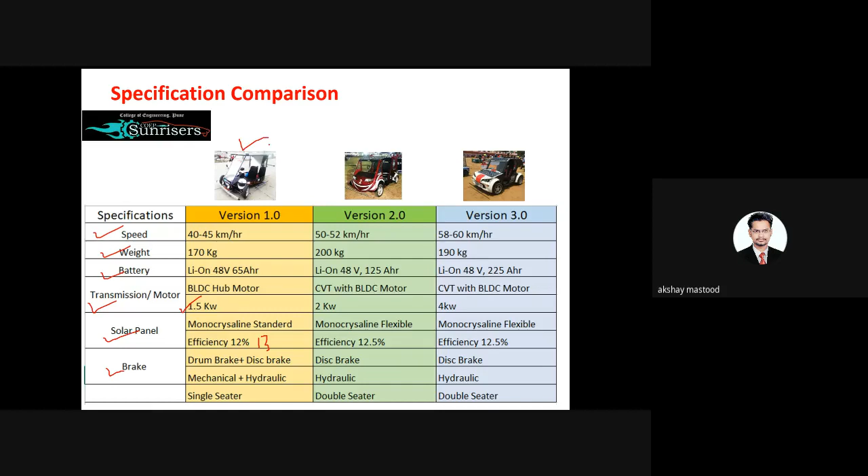The speed is about 40 to 45 kilometer per hour. Weight is about 170 kg. Batteries is lithium ion of specification 48 volt, 65 ampere hour. Transmission and motor is BLDC hub motor, with power rating of about 1.5 kilowatt approx. Solar panel is monocrystalline, with efficiency about 13 to 18%. Drum, and we use the combi brake system here. This is the first vehicle, a single seater vehicle. So these are some basic specifications of version 1.

Here we have the lab, so you will get to know what I did with the team. These are some glimpses or pictures, have a look just for 2 minutes. These are our lab, all machineries are there, related tools and everything is there. Our team consists of a different group of people, like electrical, electronic, mechanical.

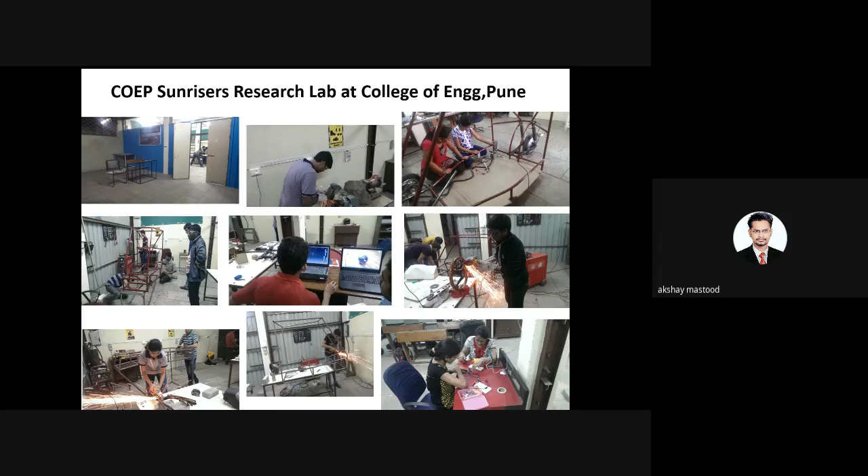And this is the particular vehicle what we are going to discuss. This is a very basic vehicle. At the initial period of time, we didn't have so much time and funds. So this is the basic vehicle we have to discuss in this particular session.

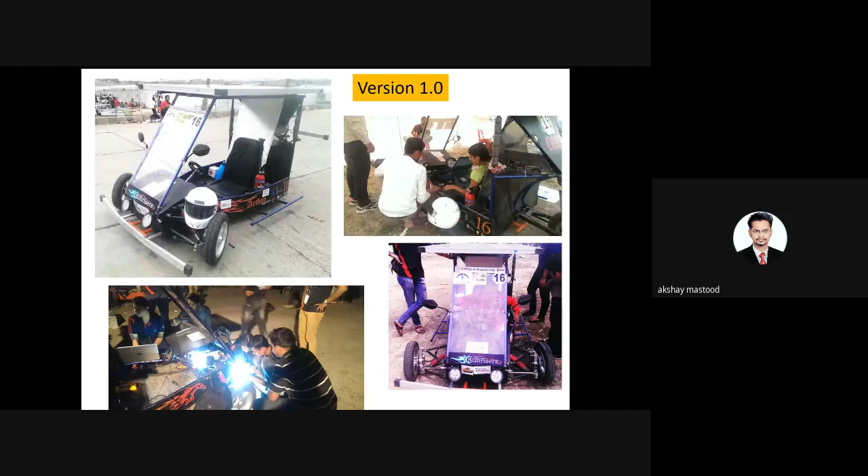So solar electric vehicle, guys, is divided into 2 kinds of systems. First is a mechanical system, and second is an electrical electronic system. I'm sure you're all aware of these systems. According to my study, about 45% is contributed as a mechanical system in the electrical vehicle, and roughly 55% is the electrical electronic system in the vehicle. In the mechanical system, these are the things: chassis, steering system, braking, suspension system, transmission system, body.

Electrical electronic system consists of motor, controller, battery and BMS, that is battery management system, solar panel and MPPT - maximum power point tracking, sensors, switches and wire harness. So these are the things we have to discuss.

Again, I am telling what we are going to discuss. First, we are going to discuss with respect to very specific constraints in a very crisp manner, which is given by the ISI - that is Imperial Society of Innovative Engineers. They give a specific constraint and rules, and according to that we design our system. We are going to discuss every design calculation roughly, in a very broad manner, not in detail.

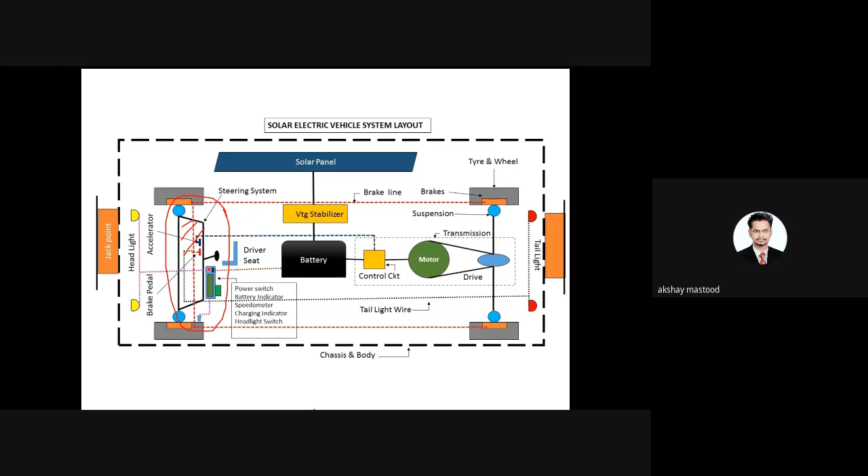So we'll start with the first system, that is chassis. This is the first system, chassis, and this is the design methodology.

How we started with rough sketches. We studied and selected that we have to design with respect to a tubular kind of roll cage design. Many chassis types are there - those with mechanical background are very familiar with chassis. Body on frame chassis, uni body, monocoque, tubular, roll cage - these are the types of chassis. So we selected roll cage kind of chassis.

The material is, I think, AISI 1018. So the first step of design methodology is to start with a rough sketch, after that go for CAD modeling in CATIA V5.

After that you have to go for crash analysis in ANSYS or Hypermesh. For the first two versions we used ANSYS, and after that for the next version we used Hypermesh.

After that you have to do the analysis, stress and deflection analysis, find out any weak point, and again change the CAD modeling according to the results you are getting in ANSYS. After rectifying all these things, again you have to follow the same process, go for the crash analysis again, if you are satisfied or getting proper readings under a certain range.

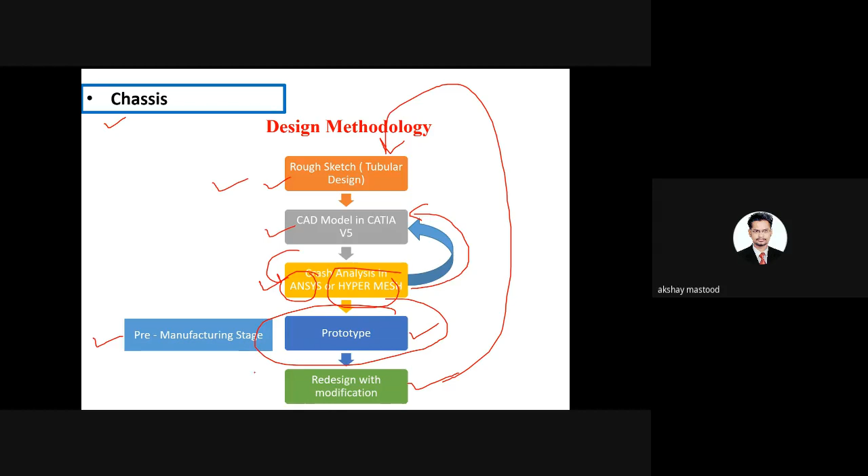So this is the design consideration - weight of the chassis should be as low as possible. Our chassis weight, you will be surprised to know, is almost 20 to 25 kg of the entire weight. I actually weighed this particular chassis, and I will show you the pictures.

After that, the design should allow for driver egress of 5 seconds. This means, for visibility point of view, egress of 5 seconds is important in case any electrical issues come or any failure of the system occurs.

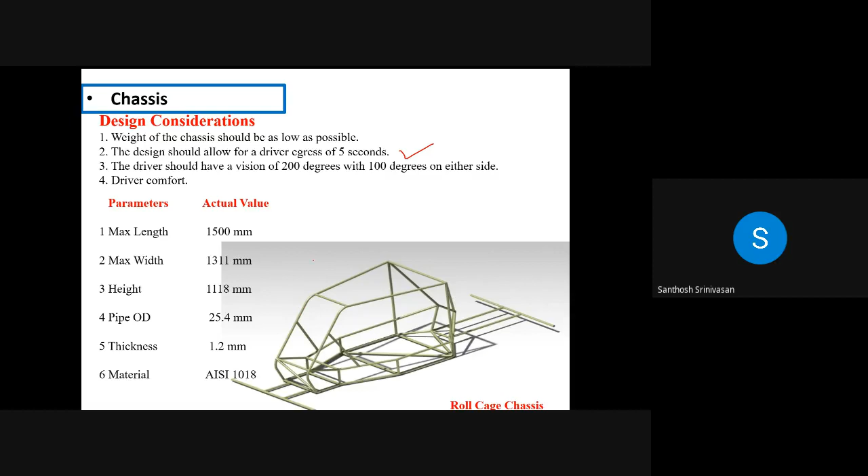Hello, yes sir, please continue. Okay, fine. So this is the chassis.

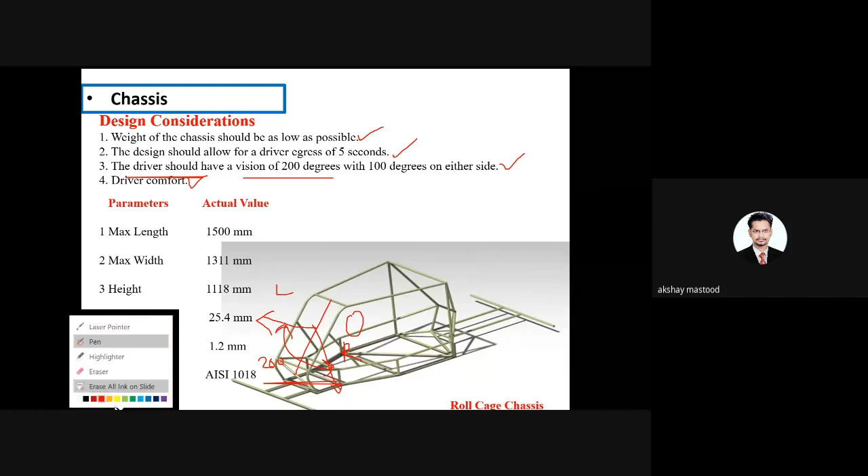Okay, and here if you observe, these are the parameters we selected after doing trial and error again and again. We finalized these parameters.

And from this is my experience, I want to share with all of you, that it's not the case that whatever we do from the design point of view is always applicable from the practical point. No, there is almost a 20% change there. Always there is a 15 to 20% change definitely there.

So these are the design point of view parameters we finalized. Maximum length is 1500. This parameter also has a constraint as per the rule book. So within that constraint we have to manage all the parameters, and obviously we have to take care of other systems too, as it is a definite requirement.

Maximum width is 1300 mm, height is 1100 mm, pipe diameter we selected is 25.4 mm, and the thickness of that pipe is almost 1.2 mm, and the material is AISI 1018. So all these parameters are very important, basic parameters related to chassis.

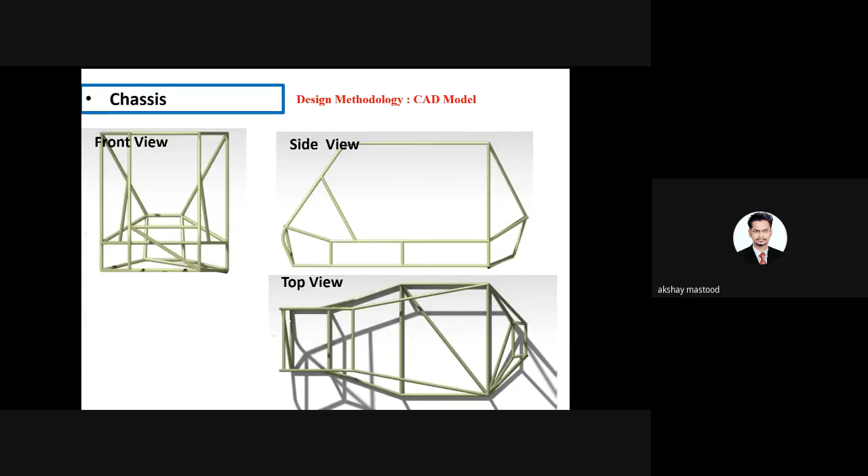So this is a front view, this is a side view, and this is a top view of the vehicle chassis.

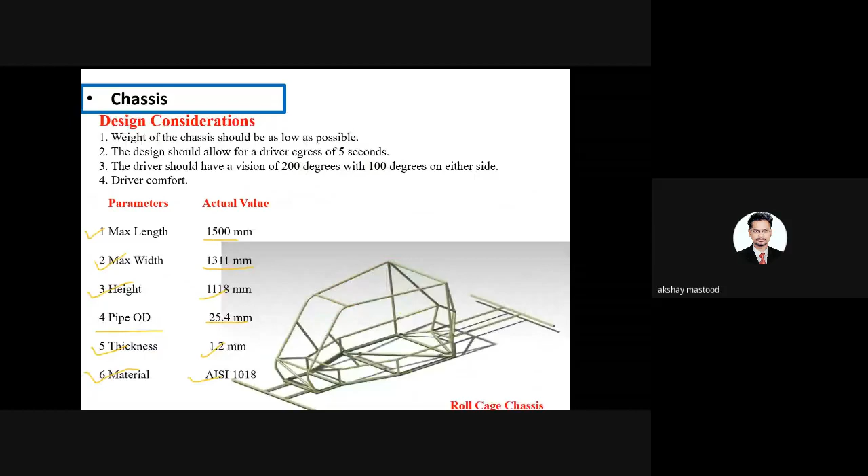Design methodologies, the next step. In the first step we design the CAD model of the chassis. In the second step we have to follow the crash analysis.

In which we have to follow some tests. Now why do we require all these tests? Definitely we have to check, in each test, whether our chassis is sustainable or not. This is a requirement, and also a design report requirement. So front impact test, side impact test, bending test, torsional test, and bump test.

And these are also followed in commercial vehicles, as you experience in cars on the roads, or conventional cars basically. And what are we going to find from all these tests? Deflection and stress plot, under all these tests.

So these are simple steps: we make the CAD model, we do the meshing, and after that we come to ANSYS. In ANSYS we are doing meshing and all, and we are giving some constraints, or following some theories, and we'll get to know the stress plot or deflection plot here.

Which is the weakest part, the stress point. Those who are non-mechanical, I don't know if they are aware or not, but I want to give a short statement. Why are we doing this? We are doing it to understand which is the weakest part in the chassis when they are facing such kind of impact.

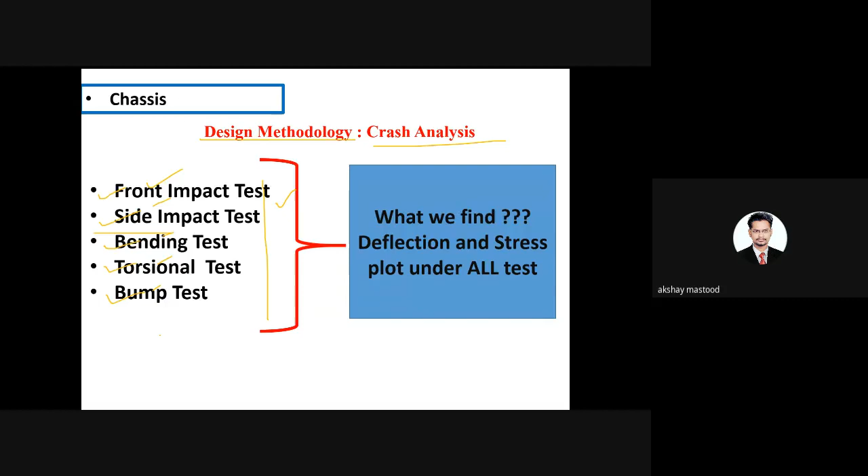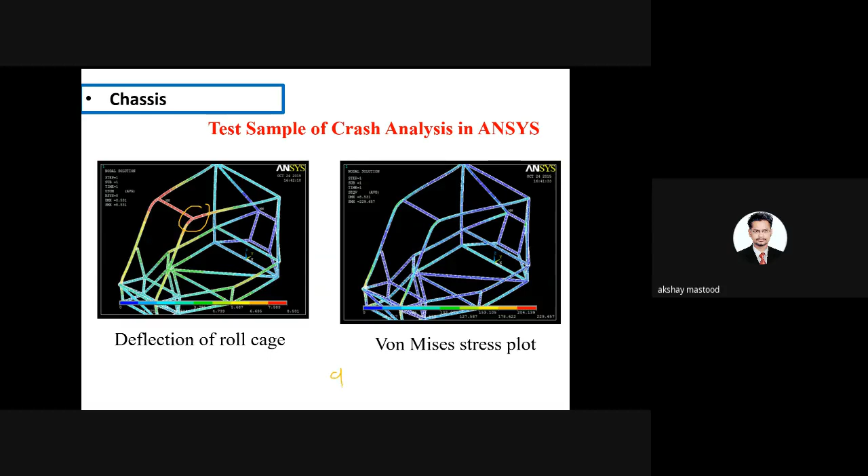Okay, front, side, bending, torsional, and bump. So we have to understand which is the weakest part, and it depends on us whether we have to go further or not, because changing with respect to each parameter is difficult at that point of time. Okay, so it depends on us whether we go forward or not. Almost, you can say, 95% if you are getting positive results.

I want to show you something, that it depends on this data. Okay, we did the front impact test, side impact test, bending, torsion, bump, and we are getting the values. These are the force values we apply on the vehicle. And we'll get to know, this is the stress, this is the deflection, and this is the factor of safety. Now if this particular range is under some specific acceptable range, then no problem, we will go for the chassis development.

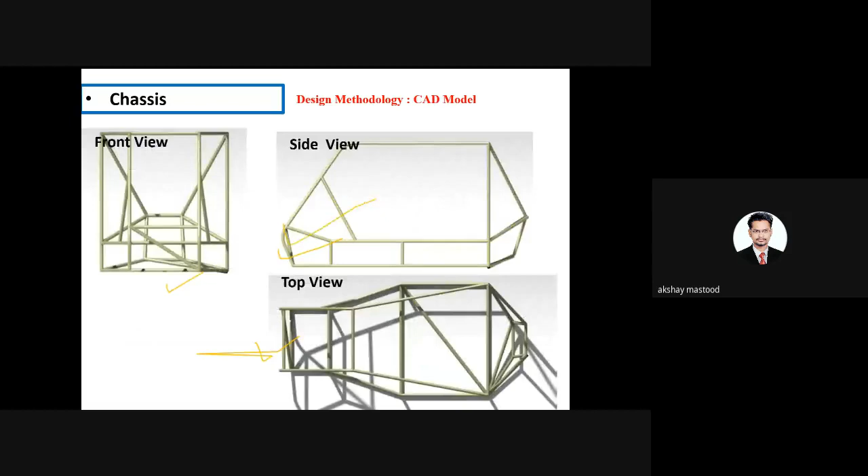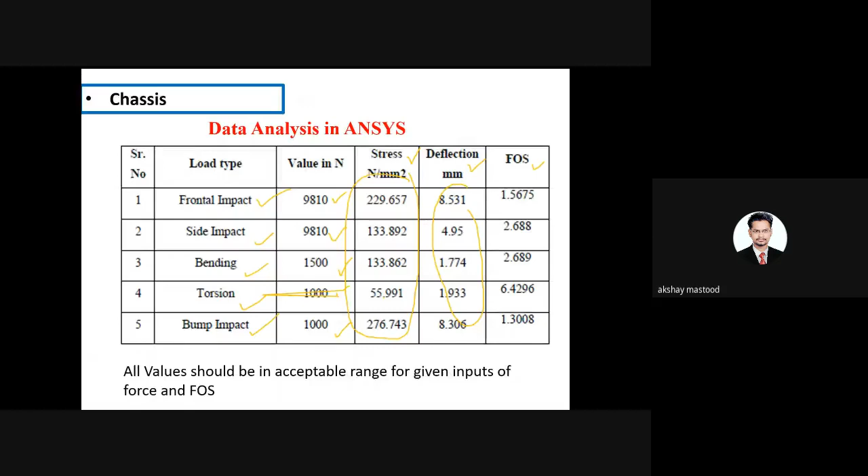Okay, so this is a pictorial view, or pictures, of all the tests we carried out in ANSYS. And this is the data analysis basically. And this is what we discussed, that after doing all the tests, after modifying, after designing the CAD model, after doing all the crash analysis, following all the station tests and carrying out the data analysis, we go to the next step, that is prototype development.

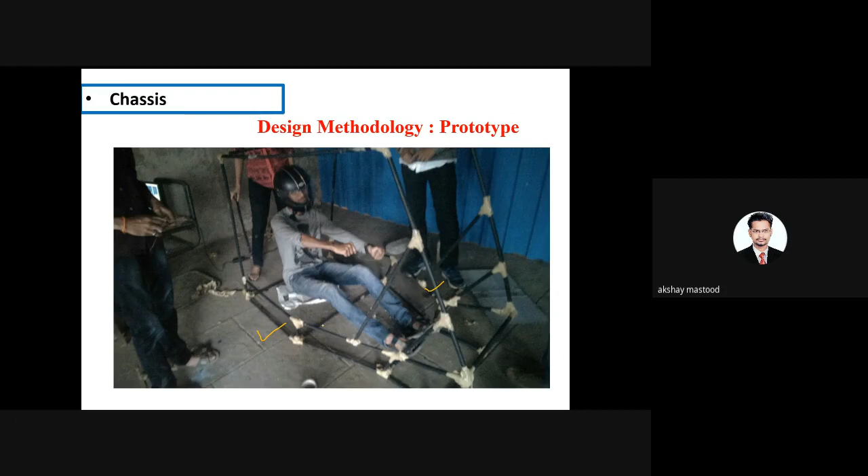Here we develop the prototype, a very basic prototype, with the help of plastic pipes. So that we'll get to know the driver position, steering position, battery position, accelerator and brake pedal position, my control panel, or what we can say a dashboard. My headlights, my tire position, my brake line, my wire harness, my motor.

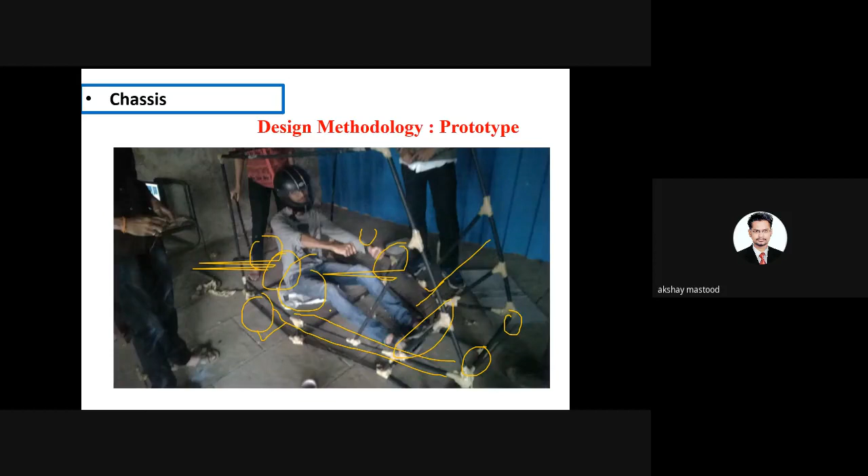So the team should understand roughly, each member, because mechanical people often don't know about the wiring things, and the electrical and electronic people don't know the position where we have to keep our accessories, so from that point of view this is very helpful. Okay, and this is the chassis. At the end, we make the chassis like this. If you observe carefully, initially we just weld it with spot welding.

Okay, see, follow the flow, all of you. I'm requesting all the fellows here to follow the flow. Initially we develop the CAD design, after that we go for crash analysis. After the crash analysis, we collect all the data and confirm that the parameters are within a specific limit. After that we go for the prototype, and after the prototype development, we say, okay, this is our chassis. So this is the flow, how things are developed from design to actual implementation. So this is our chassis.

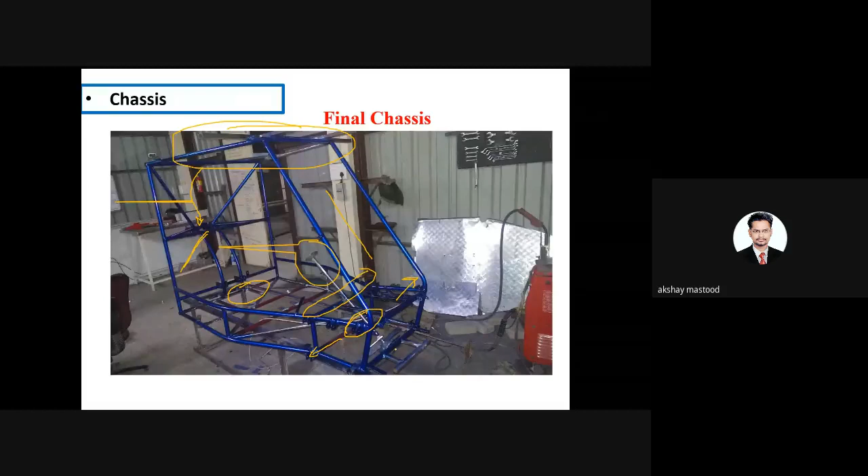Now the next system we have to discuss is the steering system. In this system we finalize all the things, and now we have to go one by one. Vehicle development is a simultaneous process, so first we discuss the steering system. Nowadays we widely use rack and pinion, but because of some constraints, the budget and the time schedule, we go for lever arm steering. Why do we use it? First, because it's very lightweight compared to rack and pinion, and second, we get a 1:1 turning ratio. What does that mean?

So that we will get a response very fast, and specifically it is very useful in cornering, because we have to go for the endurance round. Endurance means what? We have to go for the race, okay, so from a cornering point of view it is very useful. Again, I'm telling you guys, this is with respect to the initial phase and the specific constraint.

So this is nothing but the steering geometry which is designed in CATIA, okay. This is the front side of the vehicle, you are looking at the top view. From the top view you can understand here. This is the front side, and this is the rear side of the vehicle. Here we have the hub motor.

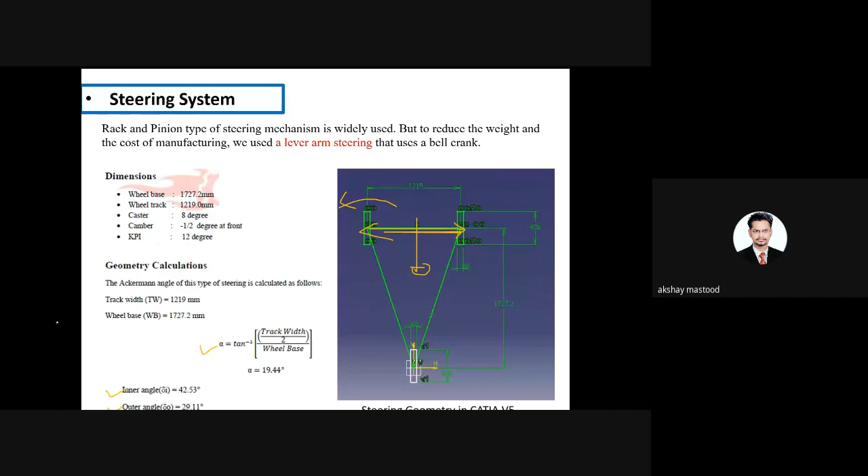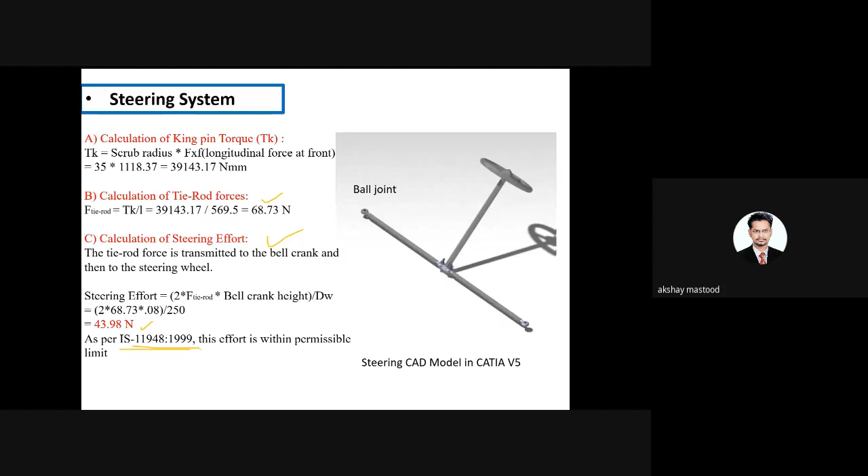Apart from that, these are the angles, alpha, and here we have the inner angle and outer angle for steering from this side. This is the steering here. So these are the basic parameters to understand the steering geometry, and these are some calculations to find out the torque: what the kingpin torque is, and how much the tie rod forces are. After that, steering efforts. Steering efforts means the amount of effort we require to steer, and obviously this is with respect to the standard IS 11948:1999. So this effort is within a permissible limit, that is what we have to prove.

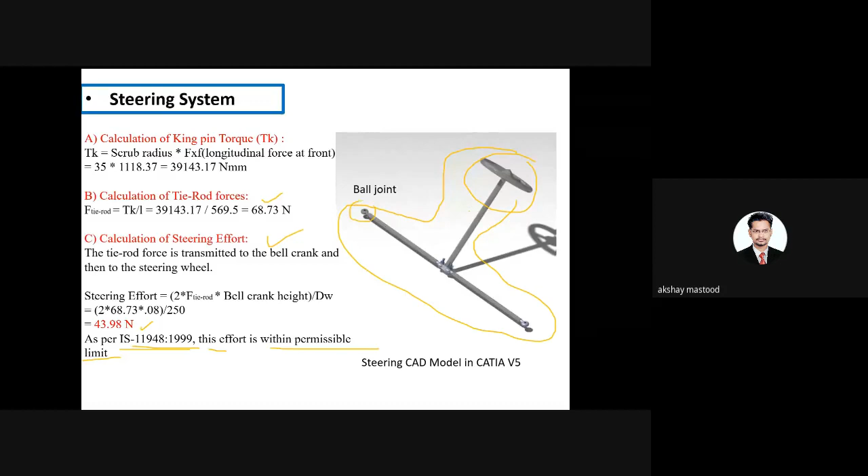This is the CAD model we developed. This is the steering rod, steering arms and steering wheel, which is connected to a ball joint. Further it is connected to, we'll discuss in practicality. So this is nothing but the entire steering system. You can easily observe here. So this is the entire steering system.

Now this is the steering wheel, and the steering wheel is connected to the steering linkages with the knuckle, or wheel. This part is called the knuckle. I will highlight here. So this is the knuckle, and this is our suspension system. The suspension system is connected to the steering linkages like this, and the steering linkages are connected to the steering rod. The steering rod is connected to the steering wheel. And again I'm telling you, it's a 1:1 turning ratio. That means if you turn the steering wheel 1 degree, the wheels also turn 1 degree.

See here, observe this particular part here like this. This is the part that you can observe here.

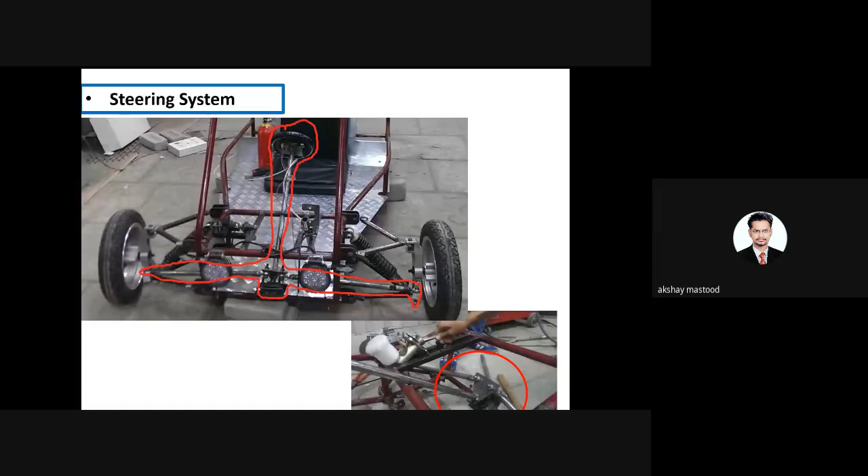Now the next system is the braking system. From a mechanical point of view, the braking system is one of the important parameters in TI, that is technical inspection. The main requirement of a braking system is that braking force should be distributed simultaneously, and the vehicle should stop within a set limit. Nowadays, you know, the combi brake system, CBS, in which we use the disc brake and drum brake.

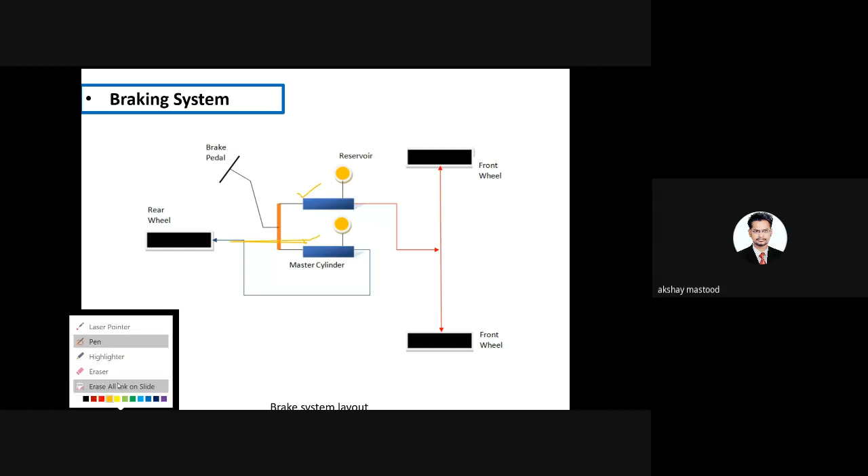See, in our design, what we did is we used two independent reservoirs. Why? These are two independent systems. Just a moment. Okay, we use a two independent reservoir system here.

And here this is the rear wheel. This is the master cylinder in which the fluid is. We'll look at it from a practical point of view. Master cylinder, reservoir, and these are the front wheels, and these are the braking lines, I mean fluid lines, where you put the brake oil, DOT 4. So this is the thing.

Basically, this is the design, but practically the rear wheel is controlled by the electrical signals itself, or we can say drum brake. Here we use the drum brake. And whatever you are looking at in front here, the wheels are controlled by the disc brake, D-I-S-C, disc brake.

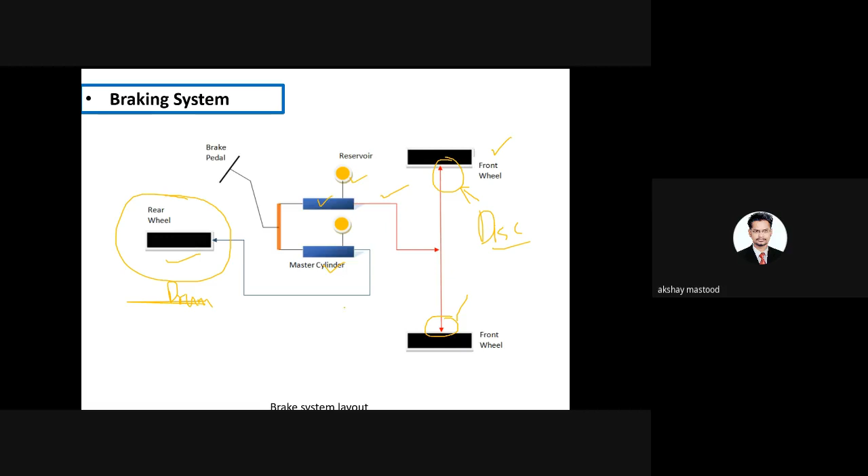Okay, this is a brake pedal, and here it is accelerator pedal. Okay, so if you observe carefully here, the brake pedal is connected to the master cylinder via this plunger. Okay, see. So when you press the brake, the pressure is developed here. Okay, and the entire pressure line is connected to the disc brake. Okay, here. So here we have the pressure line which is connected to the wheels via disc brake to control the vehicle. Okay, so this is the model.

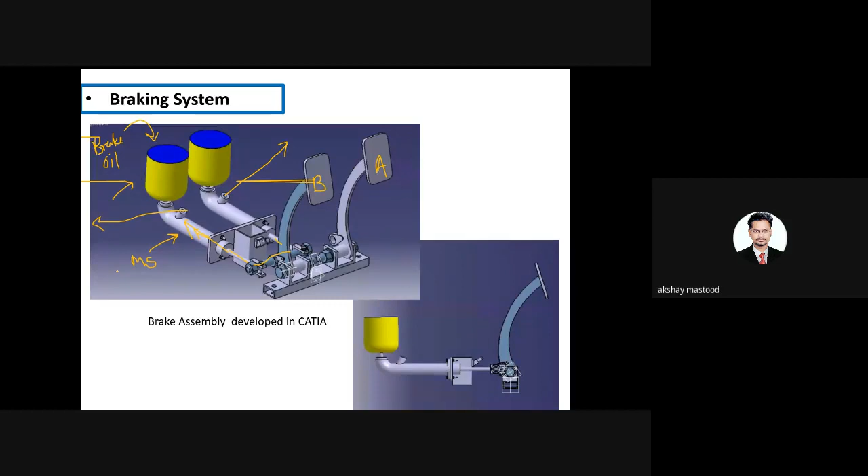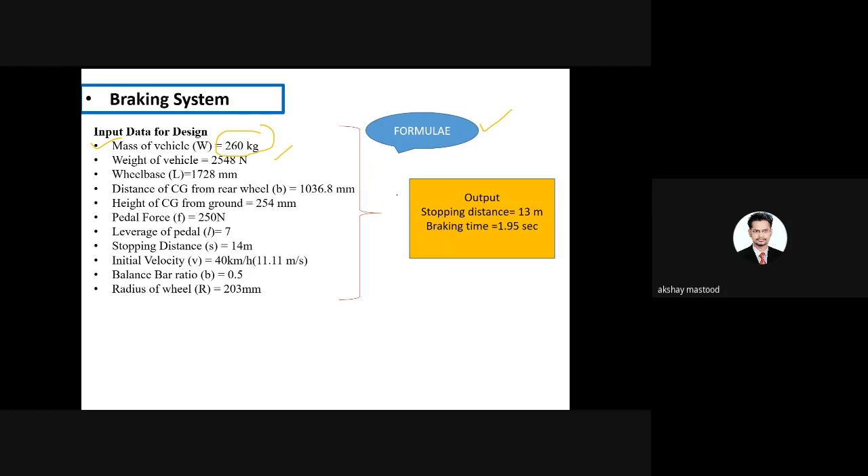If you observe carefully, here we have the output, that is the stopping distance is 13 meters. Okay, that means when you apply the brake, within 13 meters of distance the vehicle should stop. I'm repeating twice because this is very important from the technical inspection point of view. And braking time is 1.95 seconds, means within 1.95 seconds and within 13 meters the vehicle should stop.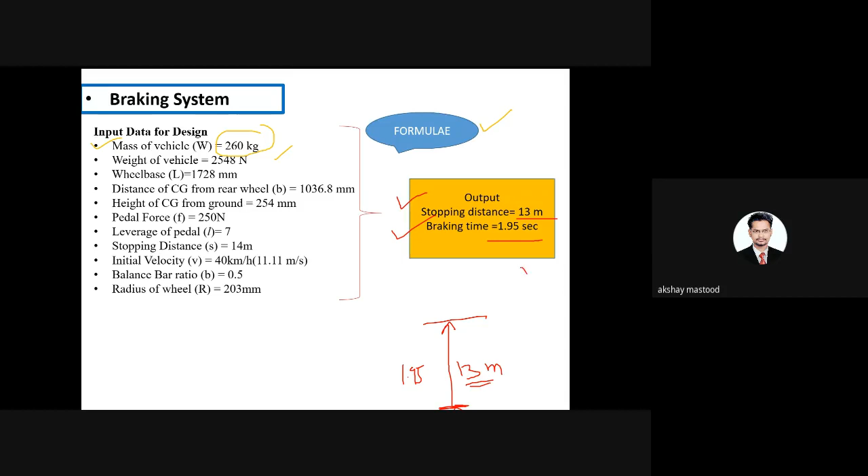How do I get to know all these things? Obviously, from the input data we require, or sometimes we have to consider some data as per our requirement. I mean, within a constraint, obviously we have to do so many things, so much research. We have to follow some research characteristics, and sometimes we have to use our own experience too. Okay, and here we use some formulas, and we get to know these are the outputs we can expect from the given data.

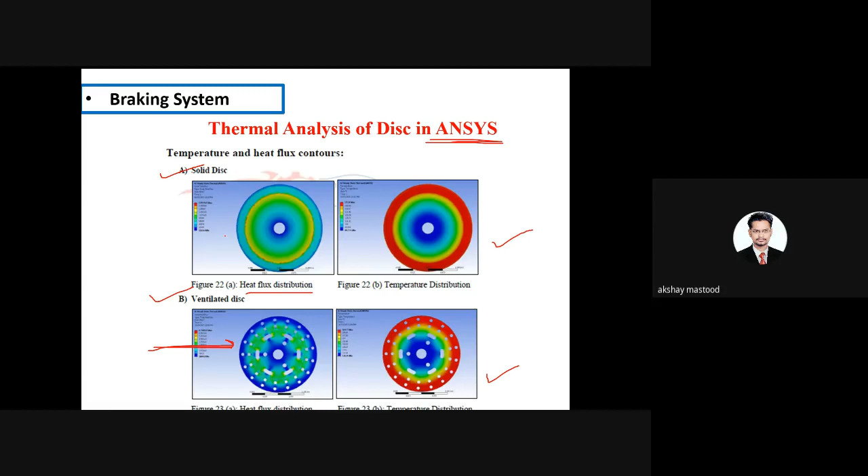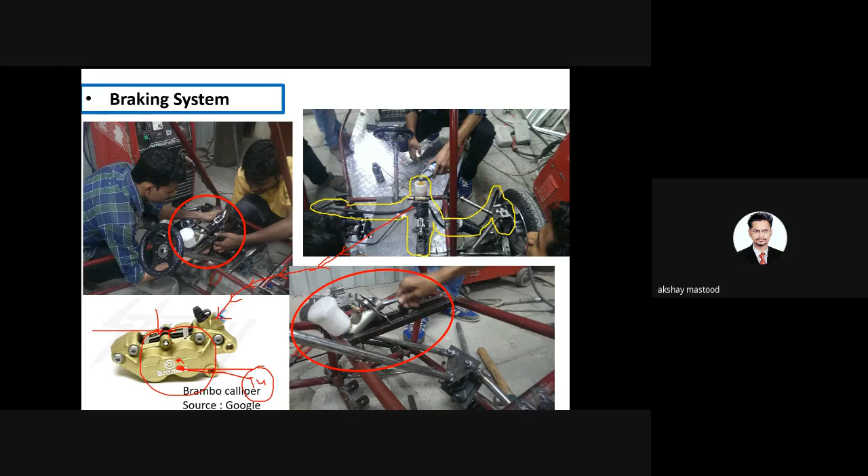Now the next system. Till now we completed the chassis, after that steering, and after that we looked at the braking system, and now we are going to discuss the suspension. Steering, braking, and suspension, all these things we cover. Now we have to proceed with the suspension system. I think sir is more aware of all the suspension systems.

So this is the suspension system. We have so many types of suspension, MacPherson we have; here we use a wishbone type of suspension system for the front, and for the rear we use the swing arm. Now why do we require a suspension? The main thing is the wheel should always connect with the road surface, whatever it is, maybe potholes, maybe some digs, in any driving mode. This is the fundamental thing.

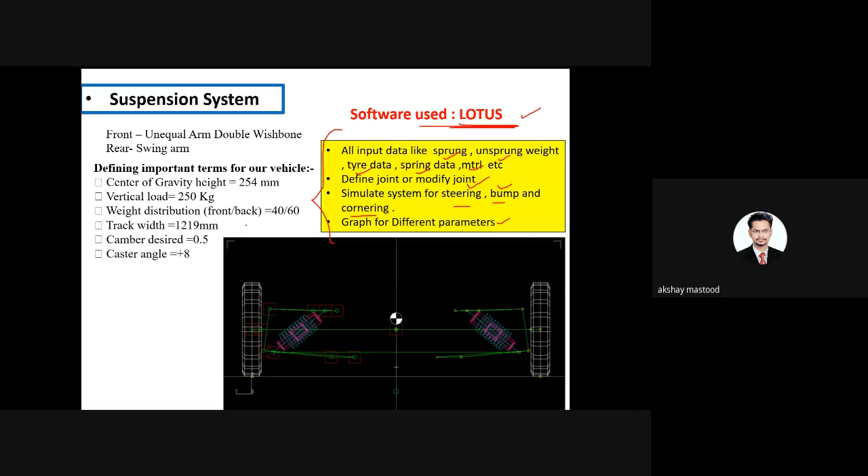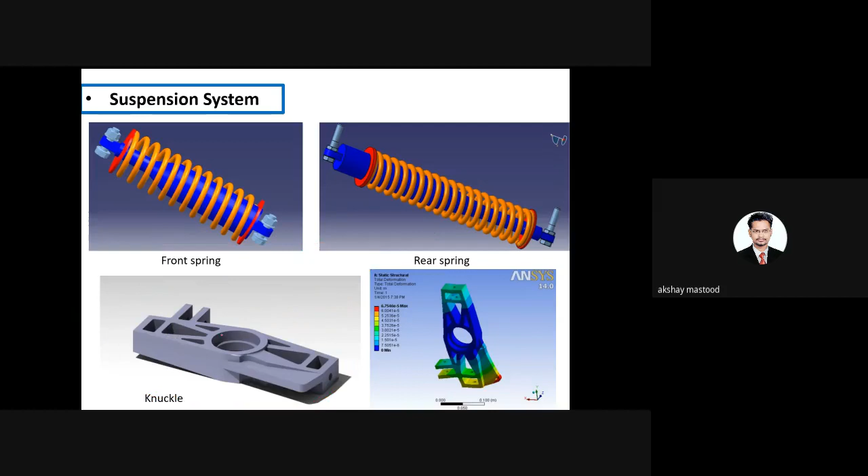But before proceeding with aluminum, we implemented it with the help of 3D printing, with a material called PLA, which is very cheaply available. We 3D printed this particular part with PLA and confirmed this is our final design. After that we go for actual production, actual fabrication. If you observe carefully, here you can see just a small part of this knuckle.

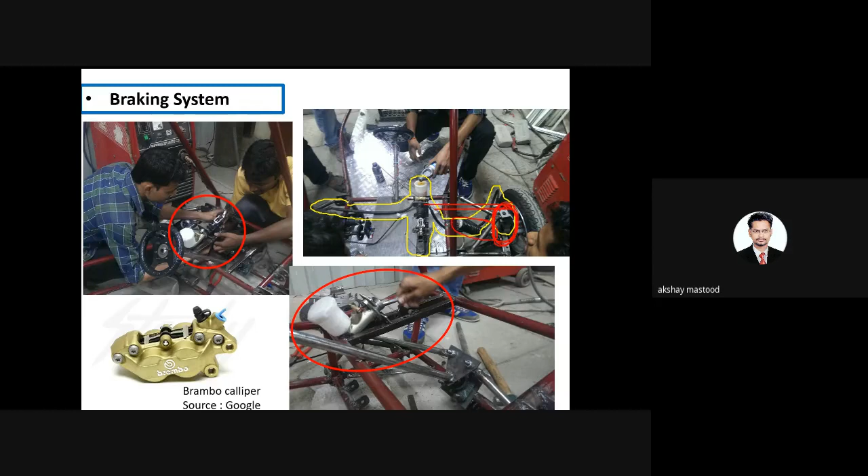Here you can observe, this is the disc brake which is connected to the wheel, and this is the part I'm telling you about. So before actual manufacturing of the knuckle, we make one prototype with the help of 3D printing. Okay, so this is the part, and we actually tested it here. This is the position, and these are the small modifications required.

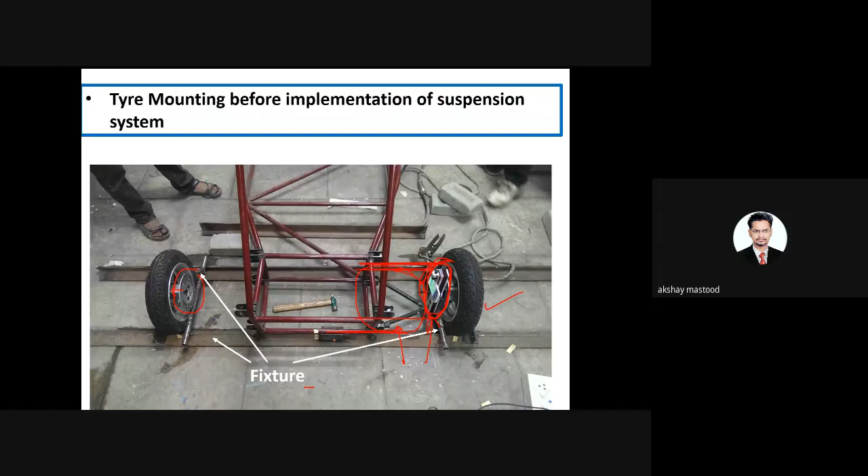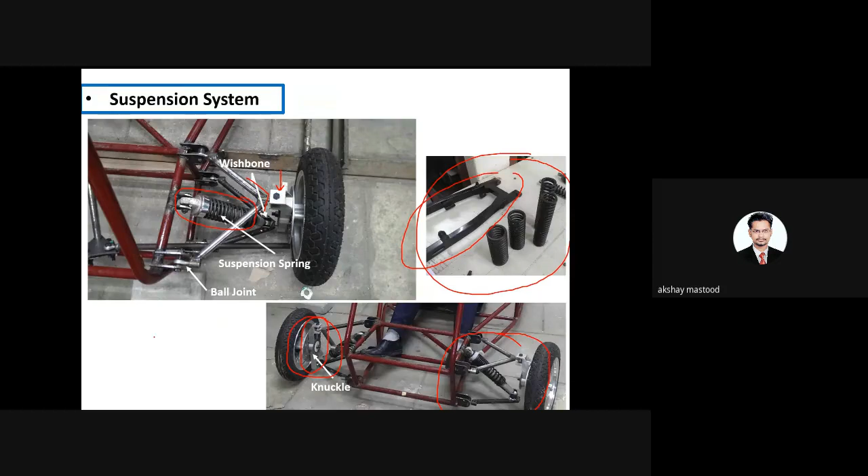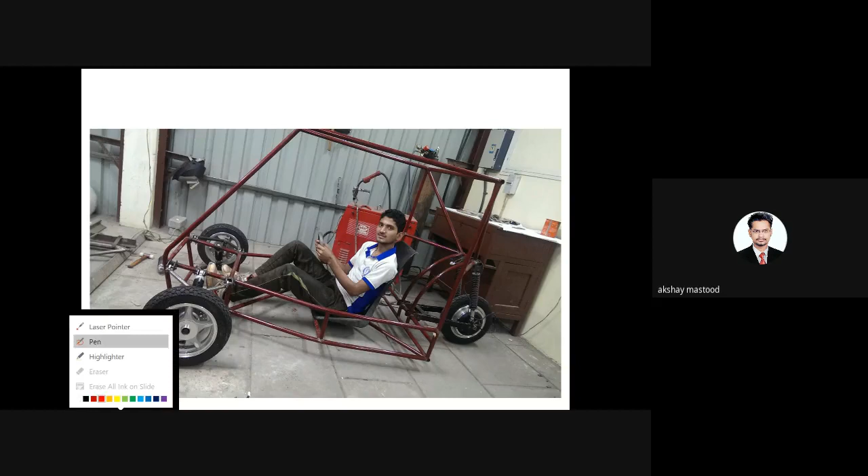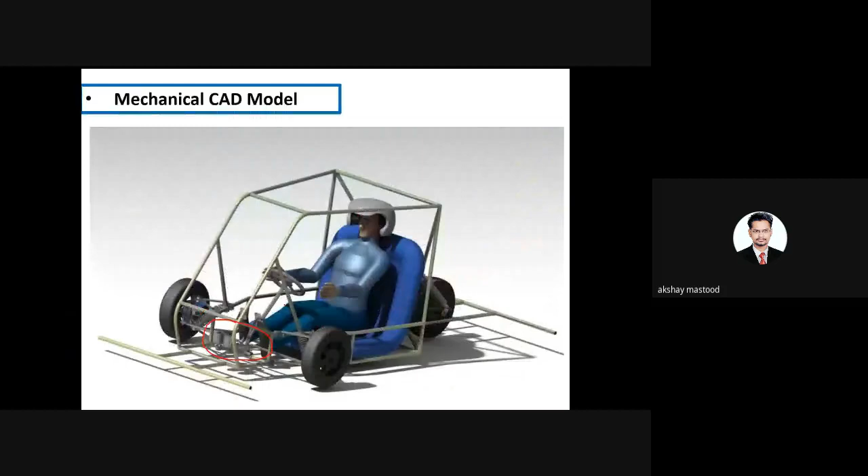Now I want to highlight one point so you can understand what happens when you are doing this kind of project. If you observe carefully, here we have two master cylinders, two individual braking systems. But practically, when we developed it, we used only one braking system which controls the front wheels. For the rear wheel we have the hub drum brakes. These are some practical modifications required when you are under some constraints. So this is the CAD model of the vehicle, and this is the actual implemented model.

Now if you observe carefully, the ground clearance is very less. Why? Because we designed this vehicle from an endurance, racing point of view, and at very high speed, stability is very important. So ground clearance should be very less. You observe in many racing cars on a track, the ground clearance is very less. Ours is approx 10 to 12 centimeters.

Up to this we discussed the entire mechanical system, starting with the chassis. After that we discussed the steering, then the braking system, then the suspension system, and now we are going to discuss the electrical system, the transmission system. Now in the transmission system or motor, basically, we have to follow the methodology point of view, so that it is very easy to grasp this particular thing.

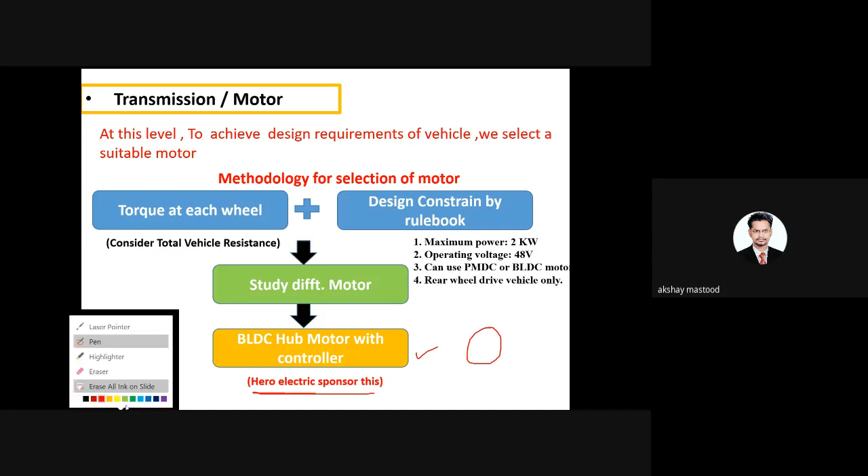So this is BLDC. Its operating voltage is 48 volt, power rating is 1.5 kilowatt, RPM is 600, and Hero Electric sponsored us for this.

Maximum speed of the vehicle with respect to all this data is about 45 kilometers per hour, but on track we are getting around 39 to 42, in between like that. It depends on driving mode basically, and the consumption of current depends on that.

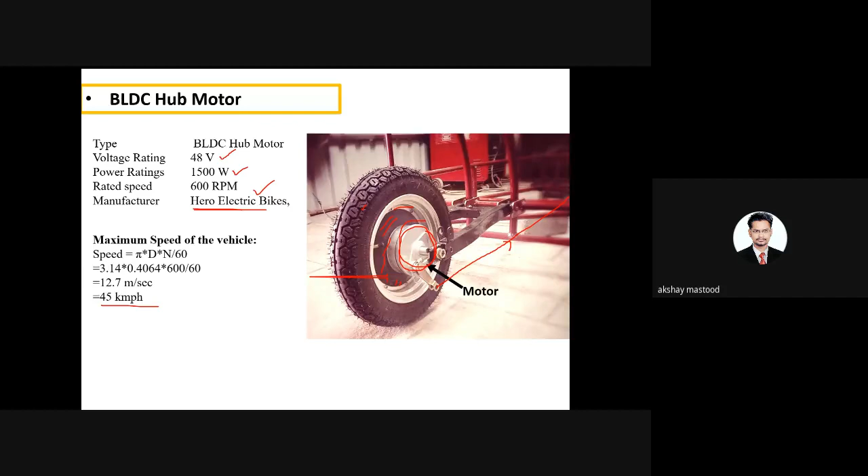In version 1, with a little modification in the motor controller, we implemented it, but in the next successive version we developed our own motor controller.

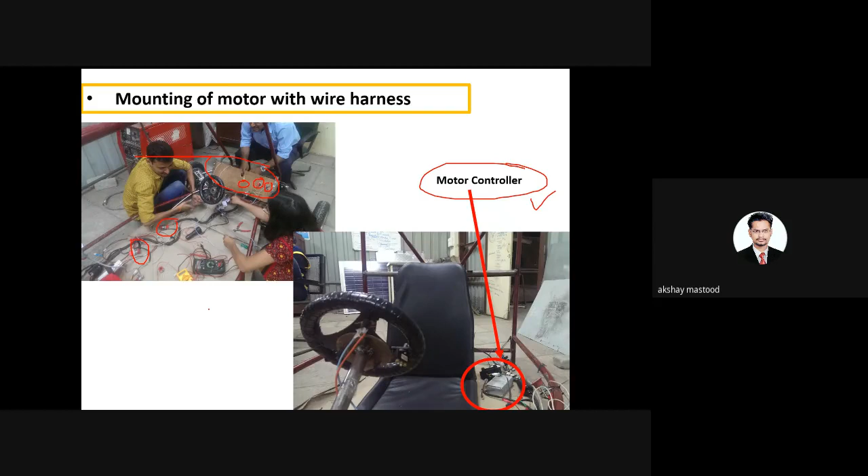So we discussed motors in the electrical system. Now we are going to discuss the battery. In battery design, we select or design the battery specification based on three driving modes, on this particular track.

These are the constraints given by ISI. For heavy acceleration, time is 3 minutes. For mild acceleration, we consider 22 minutes, and for cruise, meaning constant speed, the time is 65 minutes. The total time of driving on this track is 90 minutes.

The operational voltage is fixed, that is 48 volt. And the current required, obviously impedance or resistance is fixed. So for this particular time, with this volt, we get this current for heavy acceleration, this current for mild acceleration, and this current for cruise.

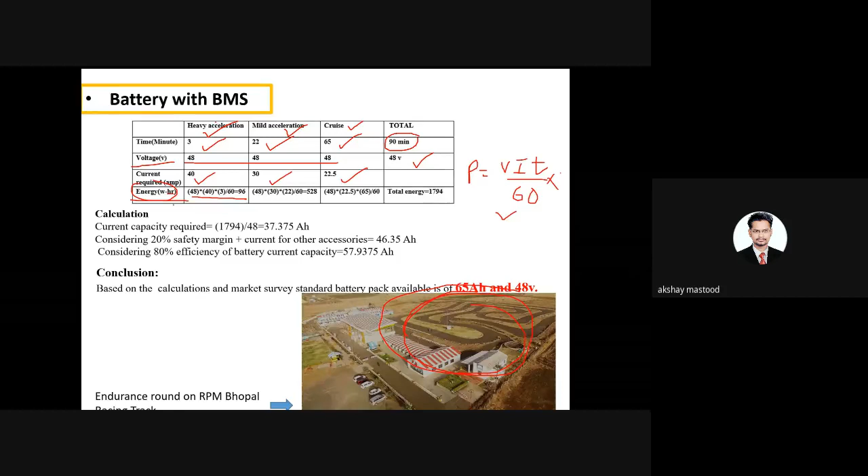This is the current requirement for each driving mode, and according to that mode we calculated the energy consumption. Energy power is nothing but V*I*T by 60. We follow this particular formula. Obviously we have to follow some efficiencies and other allowance factors too. But basically in ideal condition, we follow this formula and got the energy consumption with respect to each driving mode.

But total energy required for the entire driving mode is almost 1800 watt hour. So current capacity - why are we discussing all this? To design the battery. Designing the battery means these two parameters are very important: this is the total power required.

To drive the vehicle in this mode for this period of time, we got almost 1800 watt hour. Voltage is fixed, and from that we get to know there are 37 ampere hour of current, and after considering 20% safety margin and current for other accessories - meaning the horn or the headlights - we consider some additional current, and we get to know that is almost 46 ampere hour.

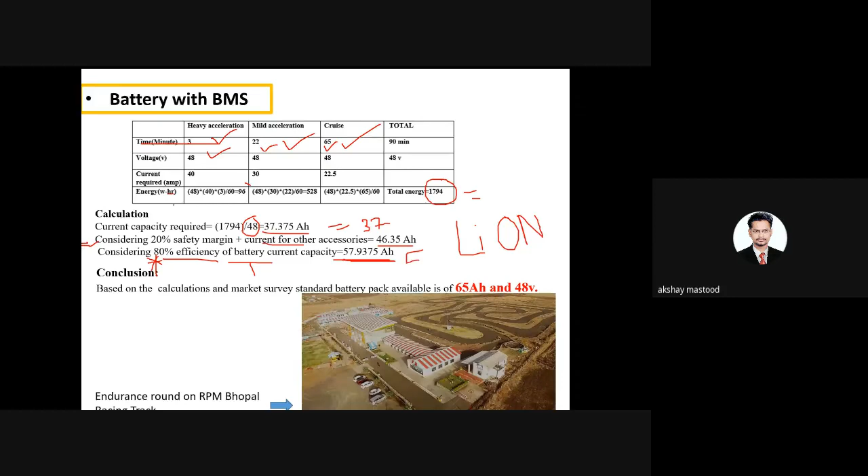Here it is important to consider the efficiency of the battery. It depends on which kind of battery you are using. We select lithium ion battery here, the same Li-ion battery used in mobile phones or laptops. With lithium ion battery, we get to know that we require almost 58 ampere of current.

Initially we have to search for the battery pack. We calculated this power, this ampere, this current, and according to that we get to know we require 58 ampere of current and 48 voltage. Power consumption, as we discussed, is 1800 watt. If you remember, my motor power is almost 2000 watt.

So we consider all these parameters and do some market survey, and we find a battery near about our specification - 65 ampere hour and 48 volt. So we got our battery, and these are the specifications. This is the actual battery. Now, small cells are there which are connected in series-parallel connections. I will show you - these are nothing but small cells like this.

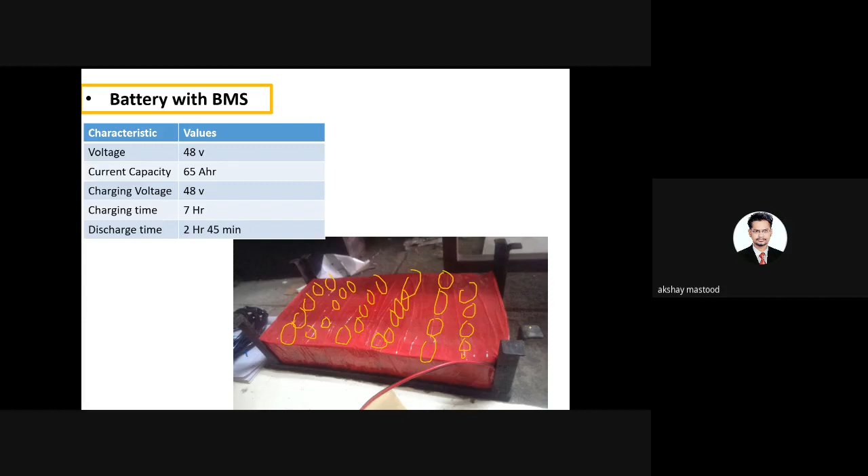Now, approximate cost for this particular battery is around 80,000 to 1 lakh. So this is the battery set. This is nothing but the entire battery.

These are the specifications for the battery. Our design specifications are different from what we get in the battery here, it is on the higher side. Charging voltage is 48, current capacity is 65, and charging time is not 7 hours, it's more than that. It took a little bit more, about 9 to 10 hours, depending on which kind of charger we are using.

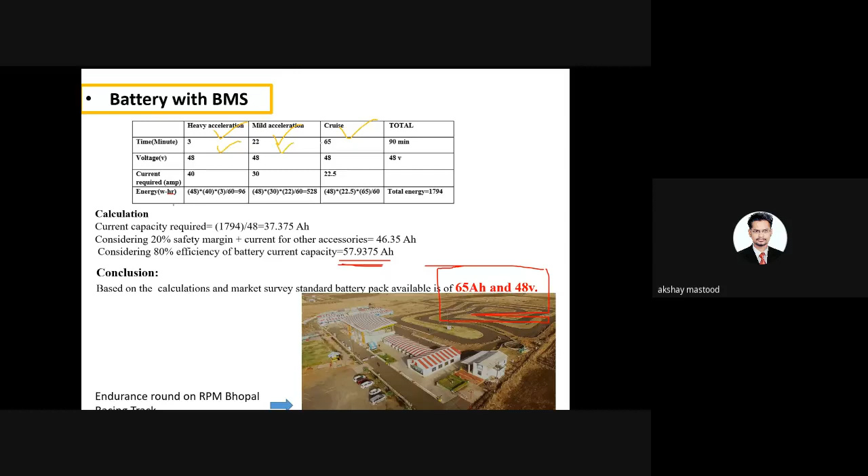So discharge timing is almost 3 hours, with respect to all this driving mode, for this period of time. That means if you implement this particular battery in your system, with respect to your driving mode, it will run for almost 3 hours.

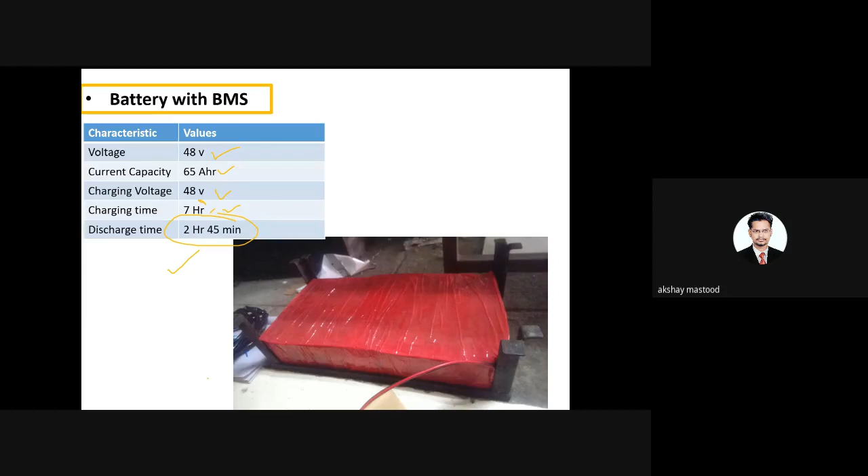So after discussing motor and battery, now we have to discuss the solar panel. If you observe, in the market there are so many electrical vehicles, but nobody is using the solar panel. Why? Because the solar panel is not so efficient with respect to power consumption or power output. Second thing is it is quite heavy. But in our design constraint, we have to use the solar panel. That's the reason we use solar panel here.

Now to design a solar panel, we already understood what power we required. Initially we didn't have the option to manufacture the solar panel because it is a very complex and costlier process. But after a period of time we successfully manufactured the flexible solar panel. Right now, in version 1, we just find out the suitable specification, and according to that we surveyed and searched for panels.

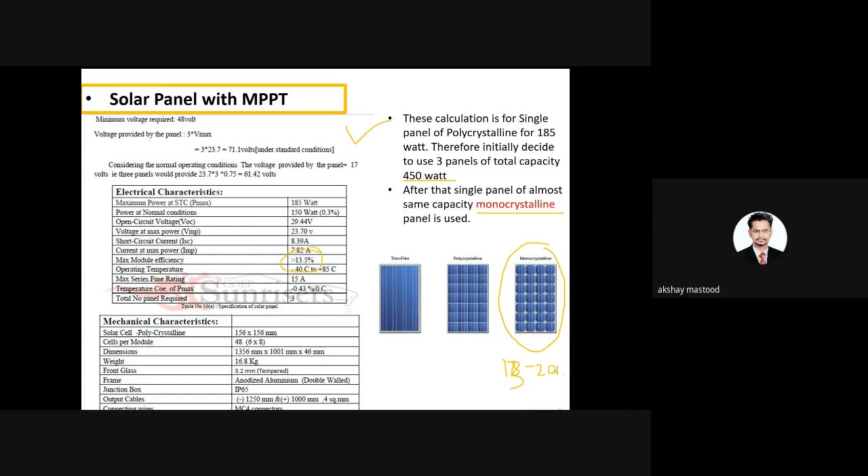So finally, the summary of this slide is that the requirement is 450 watt of energy. We selected the monocrystalline panel, having efficiency 18 to 20%, but we actually get a bit less, about 13.5%, something like that. Here you can observe 13.5.

Okay, now the solar panel is connected to the MPPT. MPPT means what? It is basically a voltage stabilizer, you can say: maximum power point tracking. Honestly speaking, I did not design the entire MPPT. I am just having a look at whether this particular thing is workable or not, and I'm giving the constraints to my team. Okay, this is the thing we have to develop, and these are our limitations. According to that, my team develops the MPPT.

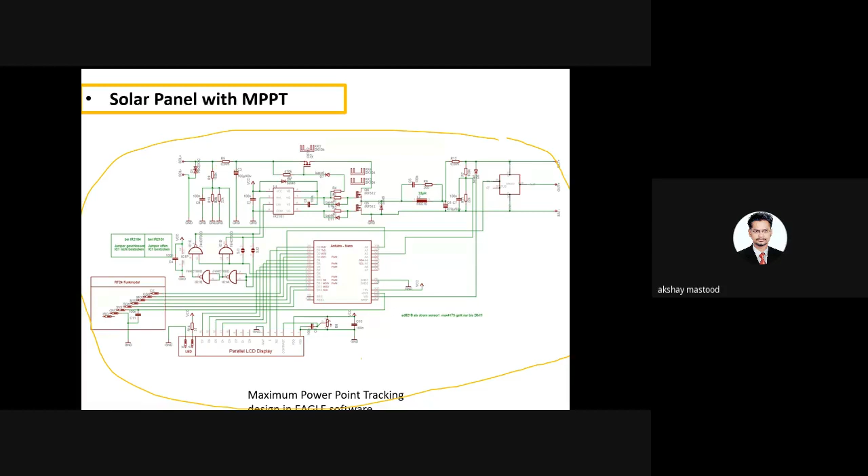Okay, I'll show it to you. So this is how the MPPT practically looks. MPPT is a kind of system which extracts maximum power from the solar cell at a suitable radiation and under some atmospheric temperature and solar panel cell temperature, and it gives the most efficient voltage to our entire system. Okay, so the MPPT is connected to the solar panel.

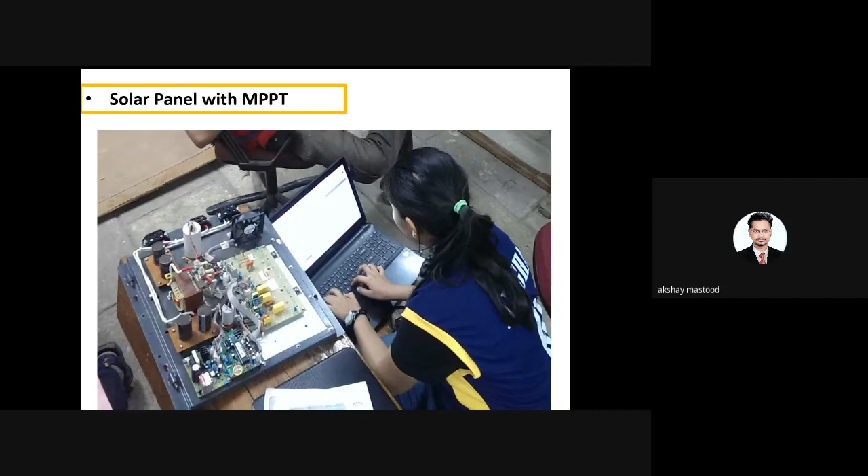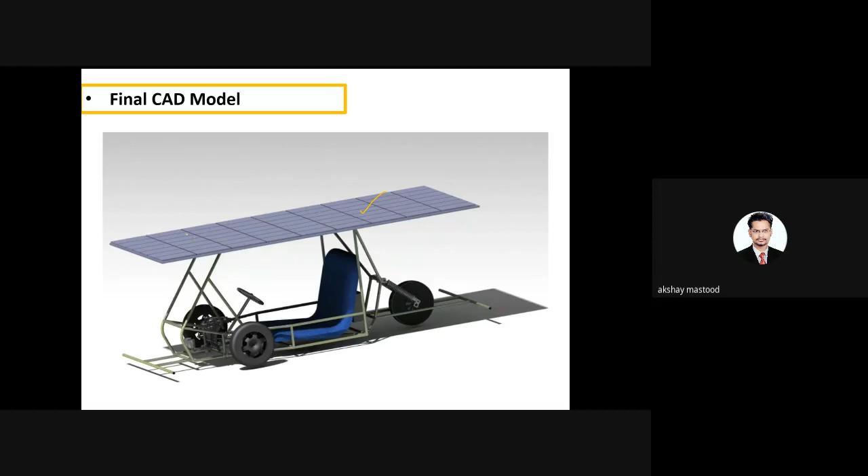So this is the thing here. So this is how it looks. This is a CAD model, this is a solar panel. Slowly we implemented small things here. Small things means what? Mechanical system, after that the electrical and electronic system, like that. So this is the final CAD model, and this is our test vehicle.

If you observe carefully, I told you these are the monocrystalline solar panels, this is the battery, and in this picture the MPPT is not available, but the MPPT is somewhere around here. So this is the position of the MPPT, this is a battery, and this is the motor. If you observe carefully, the motor cable is like this. It is connected to the accelerator via the motor controller. Here we have the motor controller.

Okay, now the MPPT is connected to the solar panel. It is connected to the battery controller, the BMS, here. The BMS is connected to the battery. The battery is again connected to the motor via the motor controller, and we are controlling the entire system with the accelerator. Accelerator means what? We are just changing its resistance so that we can control the current. If the current is more, obviously the acceleration of the vehicle increases. Small simple functionality. And here we have the entire control wiring harness, the entire electrical part of the wiring harness.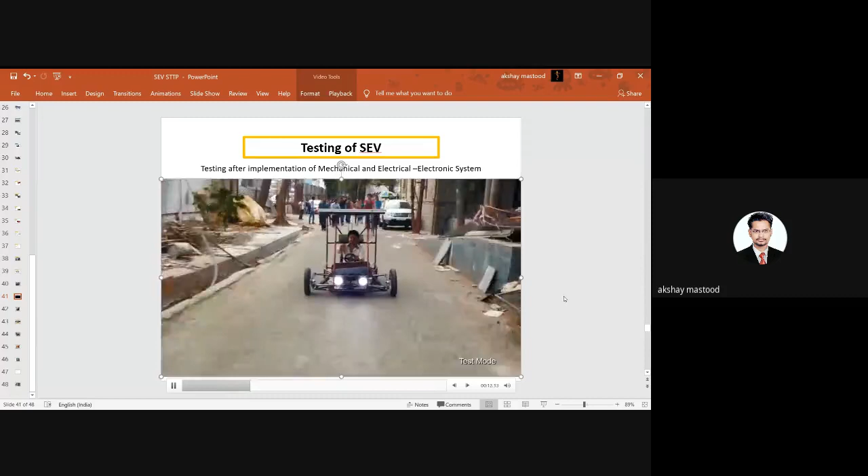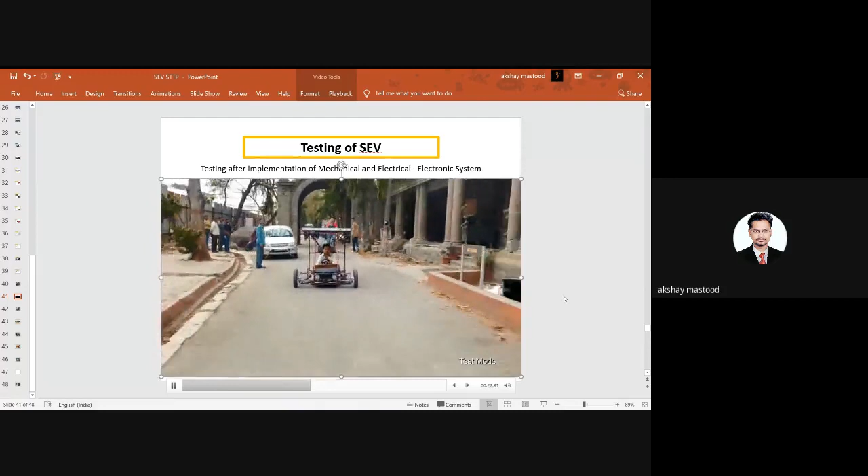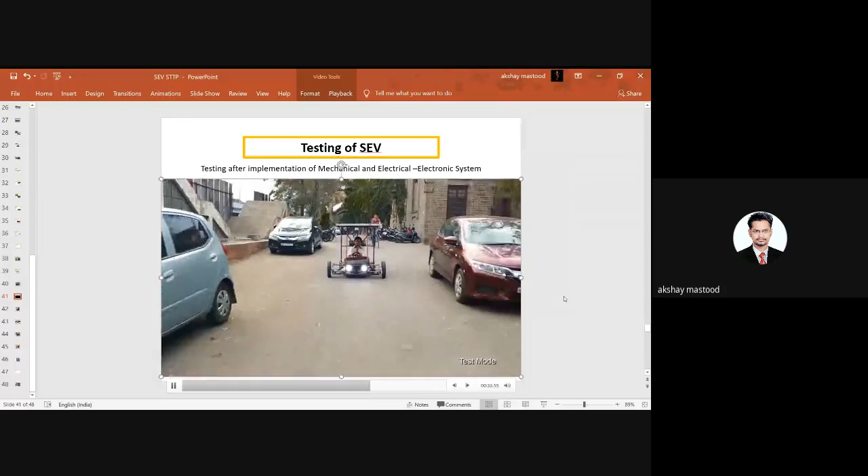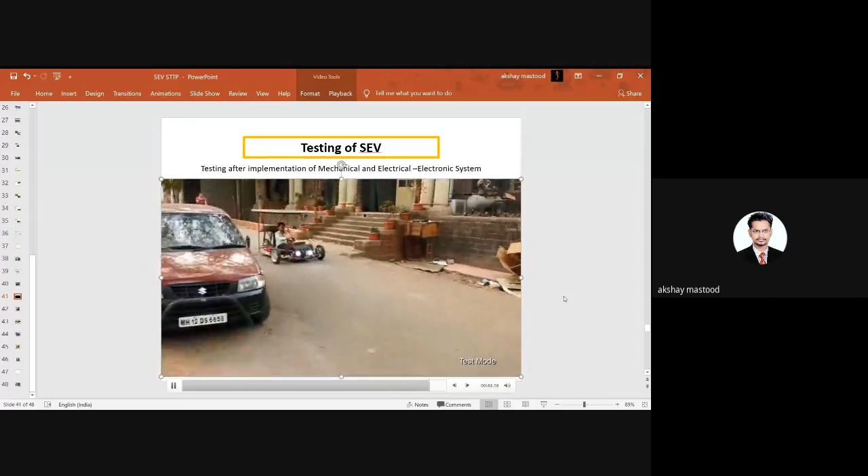Okay, this is a small video so that you will get to know the testing after the implementation of the electromechanical system. So this is a test mode, after implementing all the electromechanical systems. Just after the implementation of all the systems we have to test on road whether it is working or not. And this is the final model, the final electric vehicle.

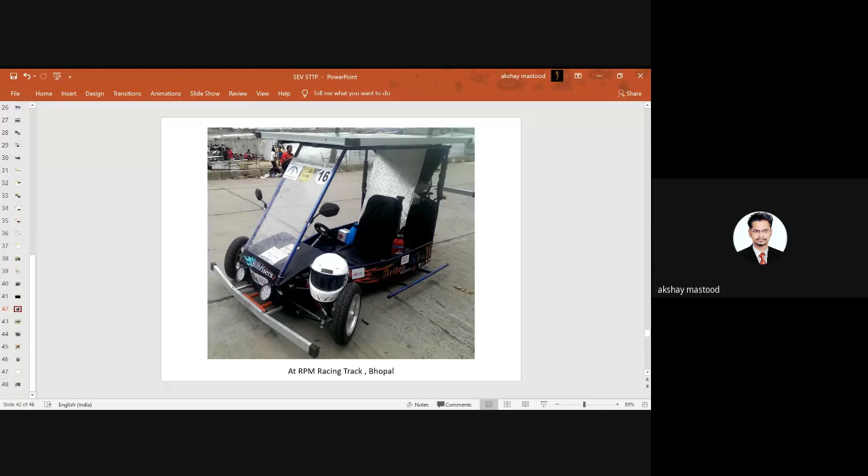Okay, so the entire system we installed on the vehicle. If you observe carefully what we just discussed in the past 45-50 minutes, all things are implemented: solar panel, MPPT, the battery. In between the battery and the driver seat we have the shield here, and other necessary accessories from a safety point of view. This is the control panel, headlight, and after that the suspension. All these things we implemented, and many more, but in a very short period of time it is not possible to discuss all of them.

And here, if you observe, this is written TI OK, meaning technical inspection. That means they check your braking system, the braking time and braking distance, and after that they check whether all safety procedures are followed or not, and also whether you have the proper gear or not, and after that they put this particular sticker on the screen. So this is the thing.

This is what I want to show you: the second version of our vehicle, far better than the first version. The speed is almost 60-65 kilometers per hour. Here we use a flexible solar panel with water resistance. The entire project is sponsored by Siemens, and this is a two-seater. I'll show you a small video, and this is just a track, one of the modes through which they are judging the vehicle. I'll show you a small video.

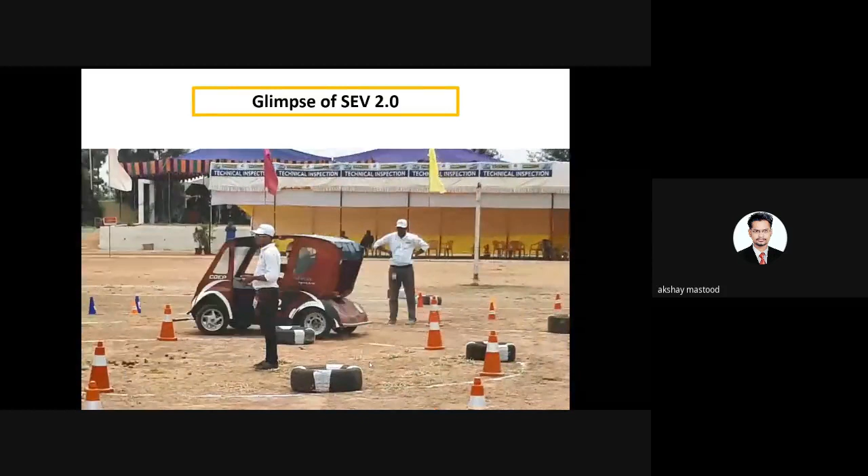They're checking the cornering on the track. This is a monocoque. Maybe you are not getting the videos, but if you want I'll send them to the sir, you can have it.

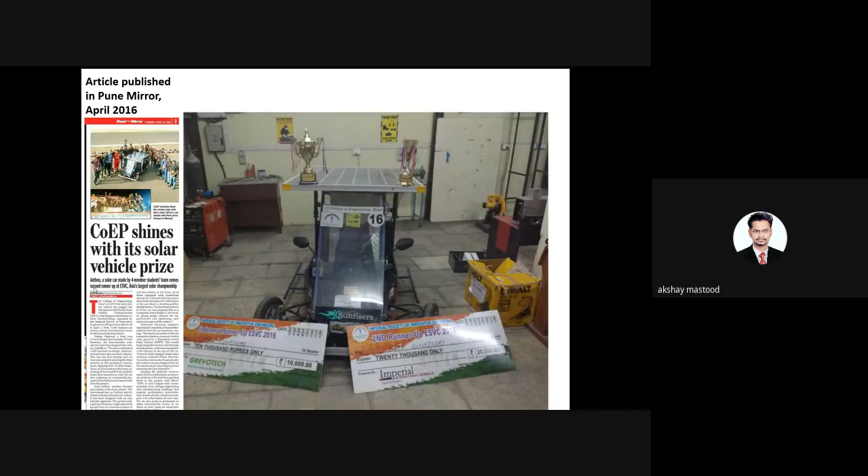And this is what, after participating in this championship, we won all this prize money, and not just the prize money but the title, that is, we were second runner up in just the first attempt, okay. We have some articles in Pune Mirror, okay. So these are the results, and in the second version, most important, we got the champion title, okay.

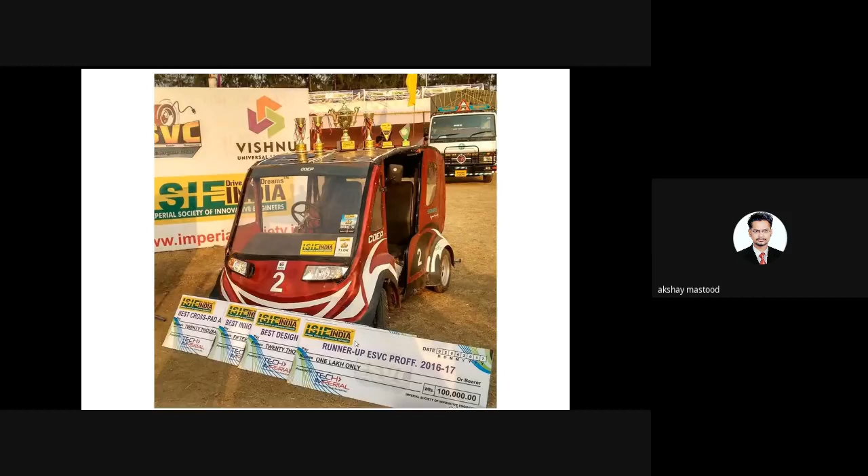So these are some glimpses. This is the third vehicle, okay, best design, best cross, lightweight, hill climb, okay, and the championship. So this is the entire journey or practical experience in front of you from my side. Thank you very much. If you have any doubts, you can contact me at any point of time, sir.

Hello. Yes, sir. Thank you very much, sir, for the nice presentation and the work that you have done at your research lab. Definitely, this will be helpful to our professors and research scholars. They may do such kind of things in their research lab or carry out the same kind of work for electric vehicles with their research scholars or PhD students.

Sir, can I say something for two minutes? Of course. See, I'm requesting all faculty members and fellows, you can learn when you are giving something to the students. So in a practical fashion you have to deliver to your students. When you are involved in such kind of project, this is very small. I am not a great guy to tell you all these things, but I just want to request all the professors that you have to implement design related or practical implementation related things in the field of electric vehicles.